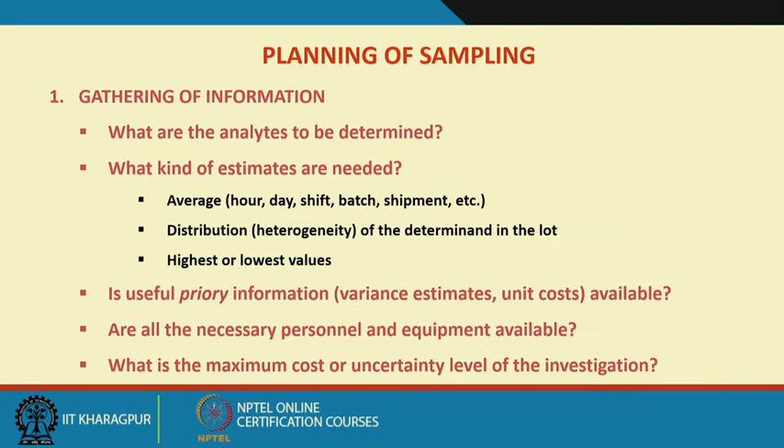Then, what is the maximum cost or uncertainty level of the investigation? As we have seen in the previous class, when you want to bring down the uncertainty level, that is, the precision level to be much more precise, meaning the errors you want to minimize, your sample weight goes up, and that means automatically your cost of sampling also goes up. So, how much money have I allocated? What is the budget? So, we should have all this ready beforehand.

Then, decisions to be made, whether we should go for manual sampling or automatic sampling. Like, if you are doing the sampling for reserve estimates, you do not need automation. But if it is a processing plant and every shift you want similar kinds of samples, probably you may think of automation, that we should have some automatic instruments or automatic equipment through which I will be able to get the representative sample very quickly.

This is also what we have already discussed, the sampling frequency, how frequently we need this sample. Suppose I am collecting samples on an hourly basis, and my plant works for 20 hours a day, so every day I will be having 20 samples. Is my chemical analysis facility or laboratory facility for size analysis equipped enough? Do we have sufficient manpower to generate the final data on size analysis or assay analysis? There must be synchronization between the two.

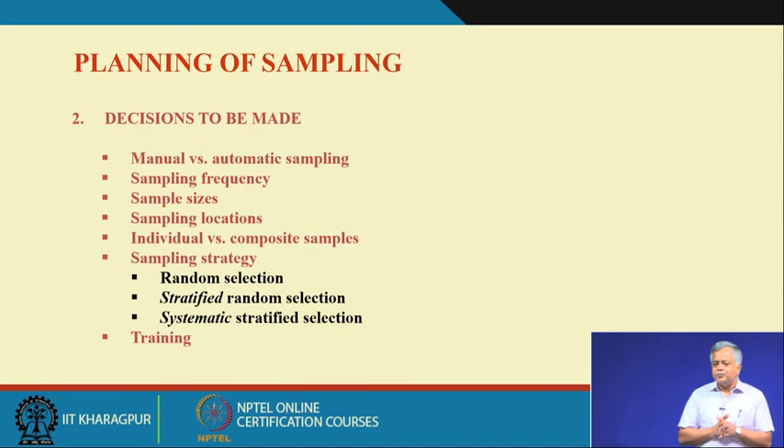Sample sizes based on Gy's equation: if we are collecting hourly samples, say each hour we collect 10 kilograms, then per day with 20 running hours we will be having 200 kilograms of sample. Do you have adequate space in your laboratory where the size analysis or assay analysis will be done, to preserve them in an uninterrupted fashion? That means we have to prevent them from getting contaminated and from other losses, as already discussed.

Then sampling locations. Sitting in your office, you might have decided that we will collect samples from here and there, but does your logistics support that? You might find that you cannot have access to that location, your safety officer may not allow it, or maybe your equipment layout does not allow you to do that. So we have to decide on sampling locations as well.

This is very important: individual versus composite samples. For example, every day you have collected 20 samples. Now, do you want the assay analysis of the individual 20 samples, or do you want assay analysis on a daily basis based on representative samples collected hourly? That means you may mix up all 20 samples of 10 kgs each, giving you 200 kilograms, and then take only one sample of 1 gram out of that for final analysis. For that 200 kilograms, again you have to do sampling at your laboratory.

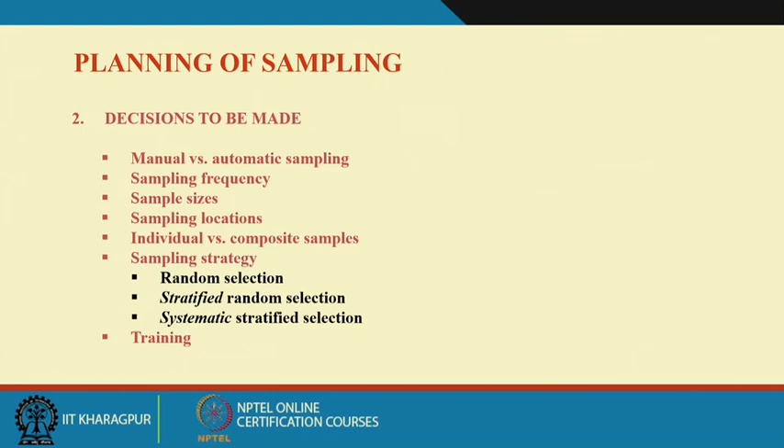We have not discussed this in detail, but I have written it down. If anybody is interested, you can look at some textbooks on sampling. I would refer Gy's book, regarding sampling strategy - whether we want random sampling, stratified random selection, or systematic stratified selection. Only interested readers need look at that.

Then training. Are the people who will be doing the sampling properly trained to do that? Do they know how important this sampling is, and that this sampling has to be done with minimum bias? So all this personnel should be well trained.

Now, plant sampling - generally it is advised that we should do it in a moving stream. The biases or errors will be minimum if we plan to sample from a moving stream. Even for solid materials, when they are flowing - say the material is transported through a conveyor belt - when they are moving, we should try to sample that. That means at the feed end, or at the discharge end, or even on the conveyor belt itself while moving, we can plan to take a sample.

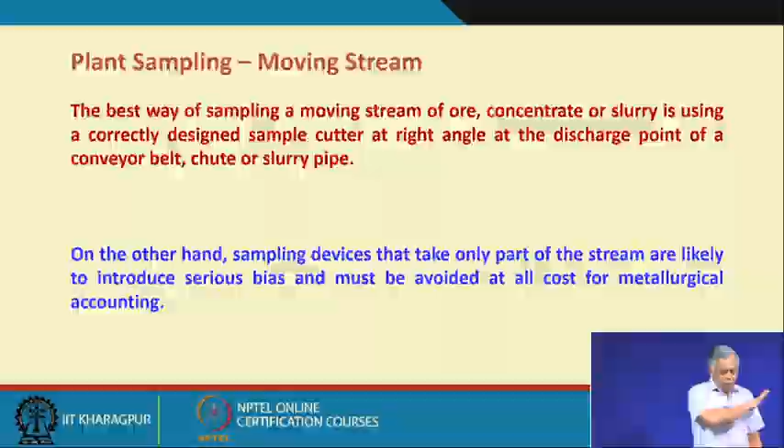The best way of sampling a moving stream of ore, concentrate or slurry is using a correctly designed sample cutter at right angle at the discharge point of a conveyor belt, chute or slurry pipe. What we try to say is that if there is a conveyor belt, you are collecting material from here and transporting it there via the conveyor belt.

So the conveyor belt is discharging the material. When the material is being discharged to another container or unit, the materials are basically free falling. There, I should have a sampling device which will cross-cut the flow - the material is flowing like this and I should have a cross cutter at right angle that takes samples at a frequency matching the material being poured. This is the example I showed you with the red and black particles in my previous lecture - that was the perfect example of what I have written here.

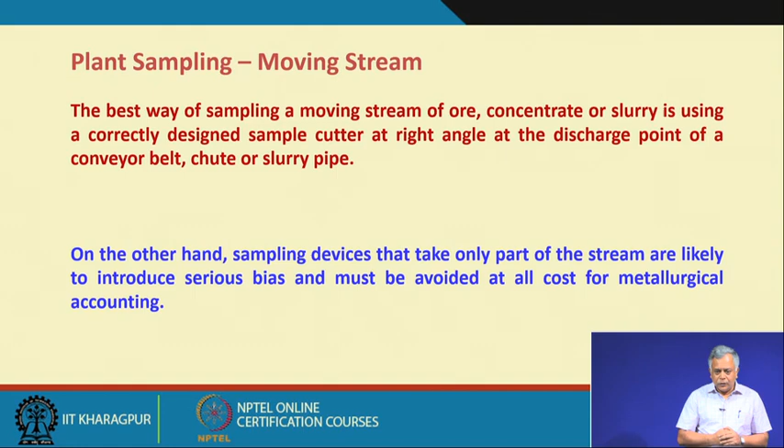Your cutter should be at right angle to how the material is flowing, falling onto the next container. On the other hand, sampling devices that take only part of the stream are likely to introduce serious bias and must be avoided at all cost for metallurgical accounting. This part I would like to show you with some examples of what I try to mean here.

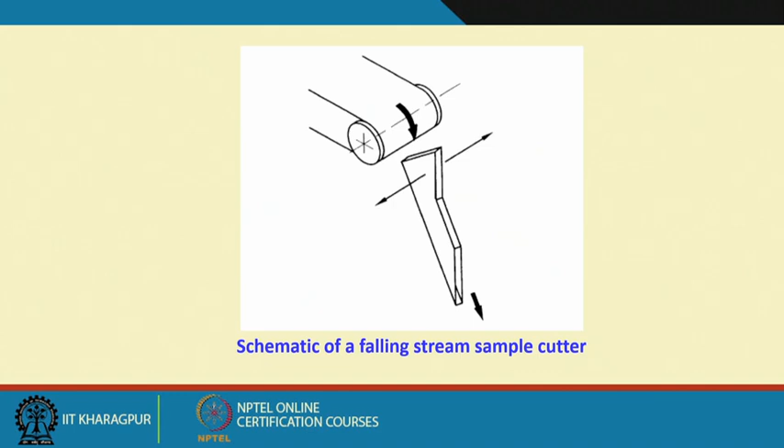See, this is a schematic of a falling stream cutter. That means the material is falling to another container here, and this is a sampling equipment. So material is falling here and the cross cutter, that is your sampling equipment, should move

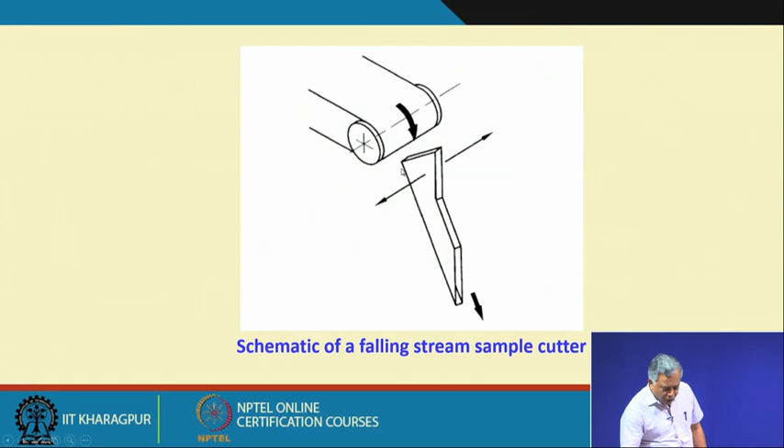in this way, at right angle, and that is the correct way of taking a sample. But suppose this cutter is moving only from here to there, you are assuming that whatever material is falling here is identical to what is falling elsewhere, but you may introduce some bias, because you may miss some particles which are not available here. So your analysis may be wrong, will be wrong, not maybe. So the first rule is that you must cut across the full stream. Do not take sample from only part of the stream.

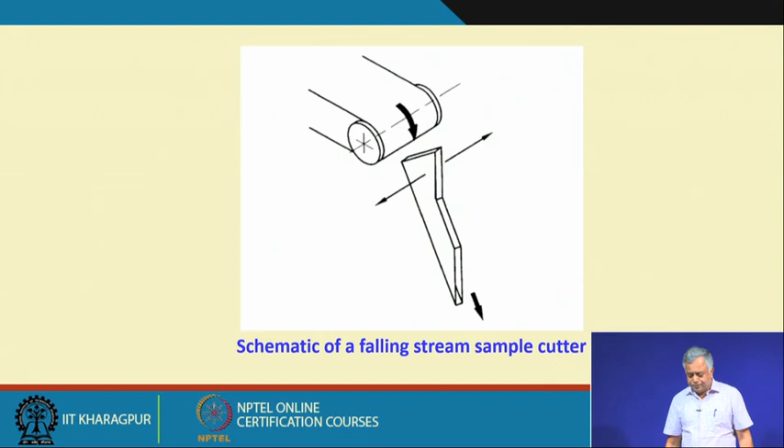Incorrect sampling, some examples I have given. First, let us have a look at this. Suppose a slurry is flowing. Slurry, what is slurry? It is a solid liquid mixture when the particles are in very fine size ranges. Now that is coming down through a pipeline,

and in many places in the plant, to make life easier, what people do is punch a hole just beside the pipe and try to bypass some of the material through this. But that is incorrect sampling, because through the pipeline, imagine your slurry is flowing like this and you have just put a hole here

and you are trying to bypass some of the slurry. Now you are not cutting the full stream. So whatever material you are getting into that side of the wall of your pipe may not be a true representative of the entire material coming down, because the other side may have different material. So you are biased towards that side, and that is incorrect. So what is the correct way? When the material is coming through the pipeline, the slurry is flowing, you have to have some means of taking the slurry sample by cutting across the whole stream.

This is another example. Suppose I give this example, like you are asked to get a representative sample from a nearby river, and you want to do the calculation of your analysis, what kind of particles are suspended in that river water. A river is suppose 30 meters wide and 10 meters deep.

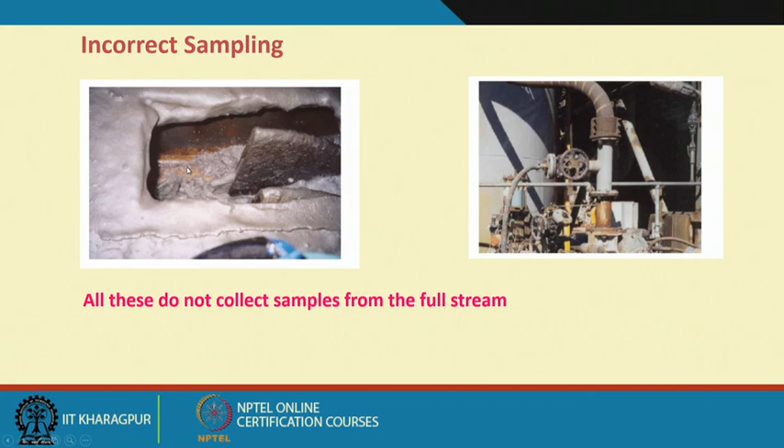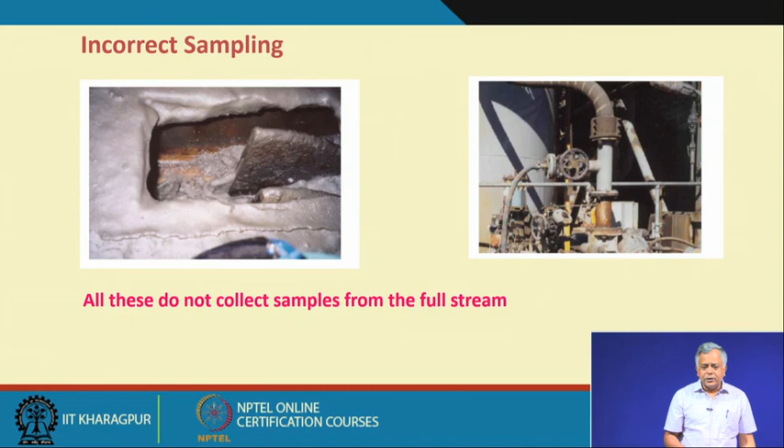That is incorrect. And many times what you do, you are tempted to put a small, it is called a shark fin type of sampling device, actually a sample collecting device. You put it there and you collect the samples. Suppose the river is this much wide and you have put some small sampling device to collect the sample from here. So you are missing these samples, the slurry that is flowing through the rest. So you are introducing biases in that. So these are incorrect samples.

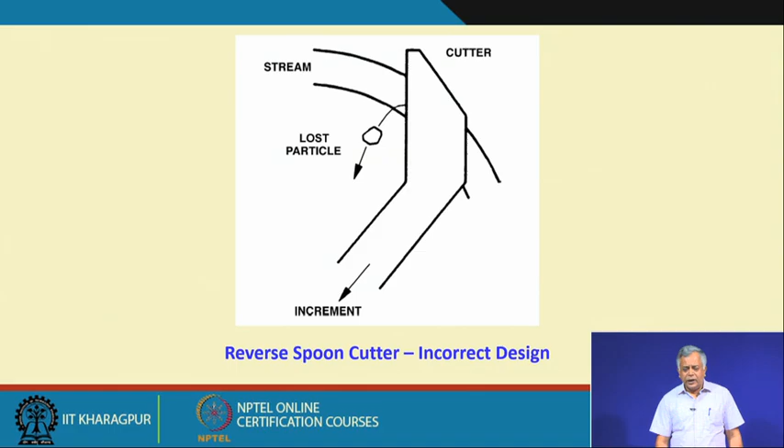This is also another example of incorrect sampling. Many times you have done everything right, that your material, your stream is coming and you have your sample cutter at a right angle, but it is a wrong speed and wrong dimension of your sample cutter. So maybe particles are getting into your container and also going out of your sample container because of wrong dimensions or wrong speed of your sample cutting device. So you are missing some of the particles which were supposed to be collected. This is called a reverse spoon cutter. This is an incorrect design because of the incorrect design.

So, most automatic samplers operate by moving a collecting device through the material as it falls from a conveyor or a pipe.

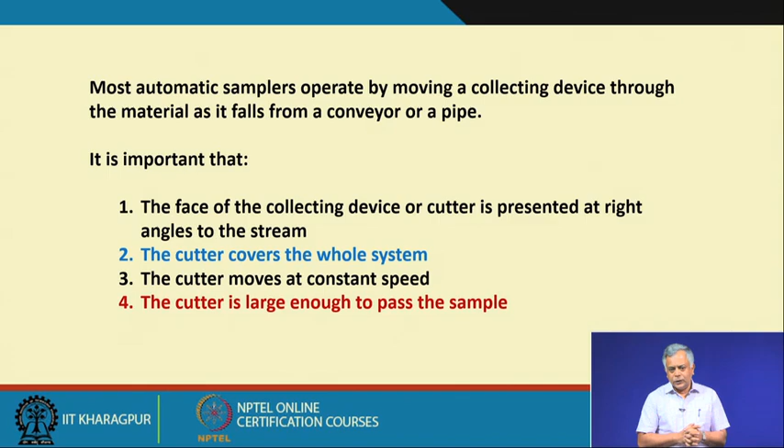If you remember in my last lecture, I showed a small animation of how a sample cutter moves across like this. That is an automatic sampler, and whatever material is being collected, you are basically collecting it at fixed intervals of time.

But before you install that automatic sampler, it is important to note that the face of the collecting device or cutter is presented at right angles to the stream. If it is not at right angle to the flow stream, you may introduce bias, because you are not giving equal opportunity for every particle to be collected at the same velocity at which they are falling.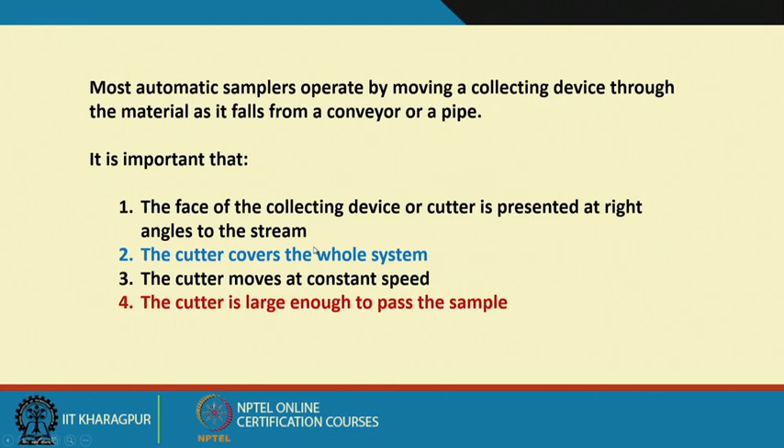The cutter should cover the whole stream. Again and again I am saying it should cut the entire stream, not partially. The cutter should also move at a constant speed.

Otherwise what will happen? Suppose I want to know the flow rate - I calculate it from how much time the cutter takes for collection of samples per unit movement.

The cutter should be large enough to pass the sample. Suppose my cutter opening can accommodate only the largest particle size of 3 millimeters, but actually in your stream you have particles more than 5 millimeters.

So what will happen? Either they may choke my cutter opening, or these particles will bounce back and not be collected in the cutter. We will not be able to take into consideration those 5 millimeter particles while doing the analysis - whether it is size analysis, chemical analysis, or any other analysis.

Now, this is generally a thumb rule, and this relationship has even been documented in some textbooks, and it is common practice regarding what should be the dimension of my cross cutter.

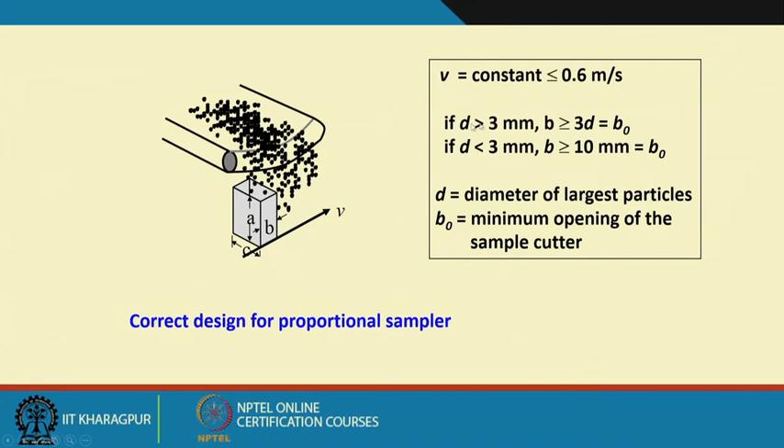That is why I said you should have prior information about the material you are going to sample. If the largest particle in the stream is greater than 3 millimeters, then my B, the width of the cutter, should be greater than 3D. That means if it is 3 millimeters, the width of my sample cutter should be more than 9 millimeters.

If D is less than 3 millimeters, B should be greater than or equal to 10 millimeters. That means if I have a 5 millimeter sample, it should be 15 millimeters or more, but if it is less than 3 millimeters, it should be more than 10 millimeters at least.

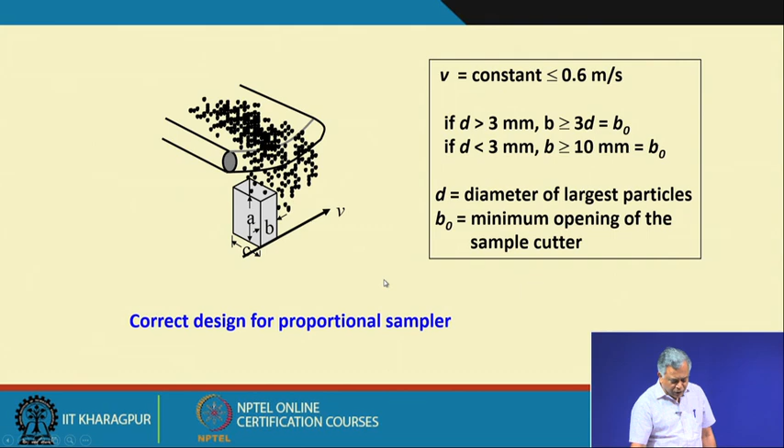So this is the correct design of my proportional sampler, as we call it.

This is an example of sampling smelter residues and wastes, because they are hard materials. Smelter residues means, suppose if you go to a steel plant, you will find slags. Initially they were in molten state when they came out from the furnaces, but after cooling they have become solid particles. So you want to know how much chromium we are losing into that.

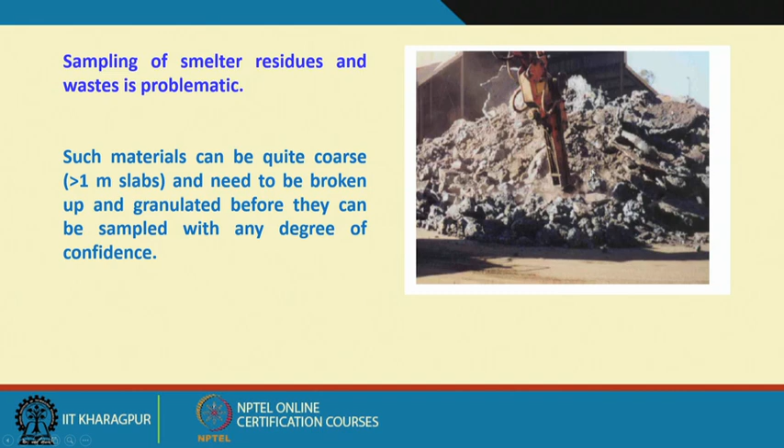So I want to do the analysis. What do I have to do? First I have to break them into very fine particles, as is written, and then we should take a representative sample and go for assay analysis.

So the breakage - how will you break it, whether you have got the right kind of equipment or not - that you should be ready with. Do not make any compromise with that, otherwise your estimates will be wrong.